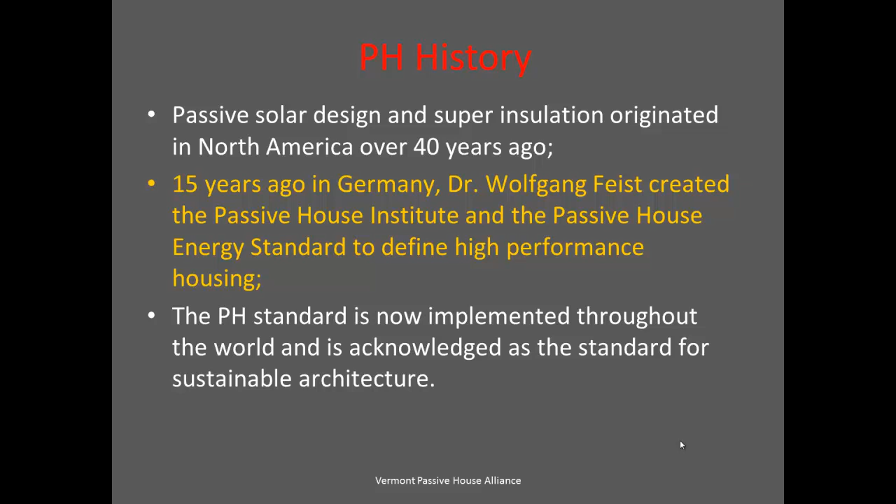And now the PH standard, Passive House, has been implemented throughout the world and has been acknowledged as a standard for sustainable architecture and low-energy house usage.

The Passive House principle is based upon the highest energy standards applicable to all building types. So we're not just talking about residential buildings, we're also talking about commercial buildings. The main focus in the Passive House is on energy conservation through making the building envelope as energy efficient as possible. That's where the name passive comes from - you put a lot of energy and effort into making the envelope as good as possible so that the actual building during use uses as little energy as possible. It uses a very sophisticated energy modeling software to inform design decisions.

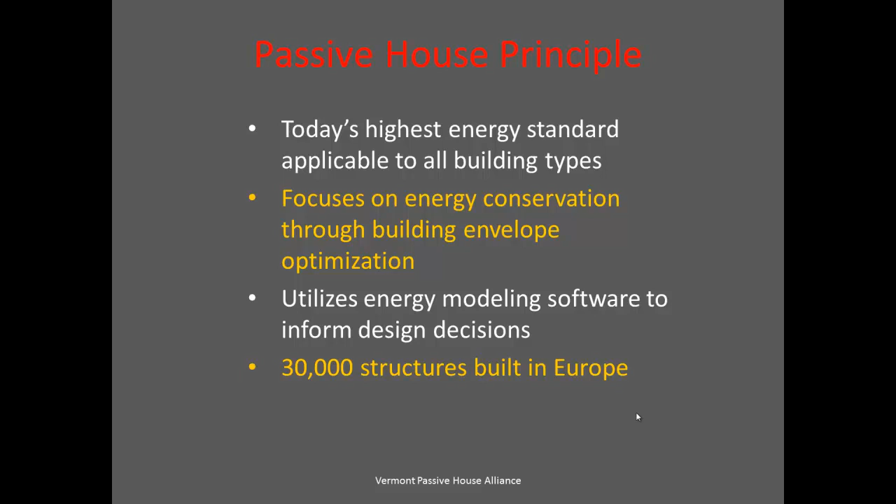There are more than 30,000 of these structures built in Europe, so it's not as if Mr. Feist created the standard in 1995, built 3, and everything is based on 3 buildings. Now there are more than 30,000 structures and buildings built in Europe, and these buildings are operating as designed.

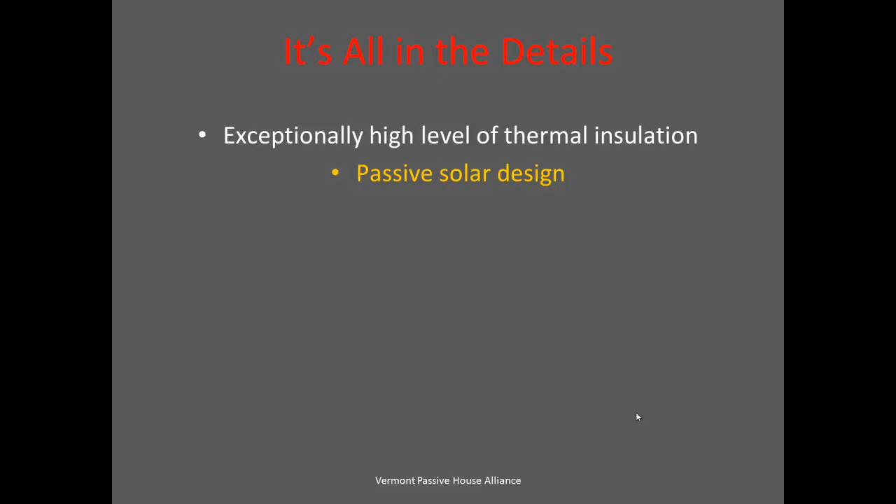With a passive house, building the actual envelope is all in the details. We have an exceptionally high level of thermal insulation. We have a passive solar design to capture as many BTUs of heat from the sun as we can during the heating months. We use extremely well insulated windows with extremely well insulated frames and triple low-E glazing.

We build our buildings so that they are thermal bridge free, which means there are no places, or as few places as possible, where cold can seep into the house or heat can seep out. And we demand a very high level of airtightness on our buildings. The current code, the RBES code, has an air changes per hour of approximately 4.

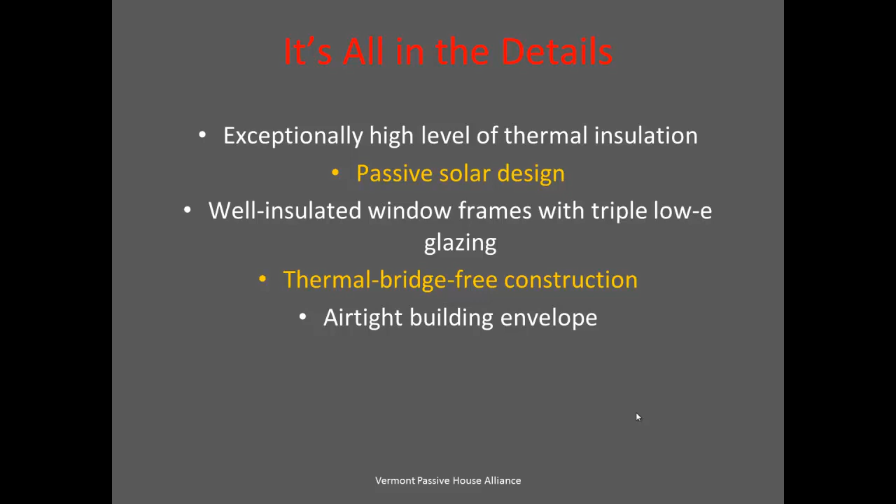The Energy Star standard has an air changes per hour of 3 at 50 pascals, which is about the same as a 22 mile per hour wind blowing on the outside of your house. The Passive House standard is 0.6, so less than 1 air change per hour. And we have a high efficiency heat recovery ventilation system. Because we build our houses very tight, we need this recovery ventilation system, but this also adds to the energy efficiency of the house.

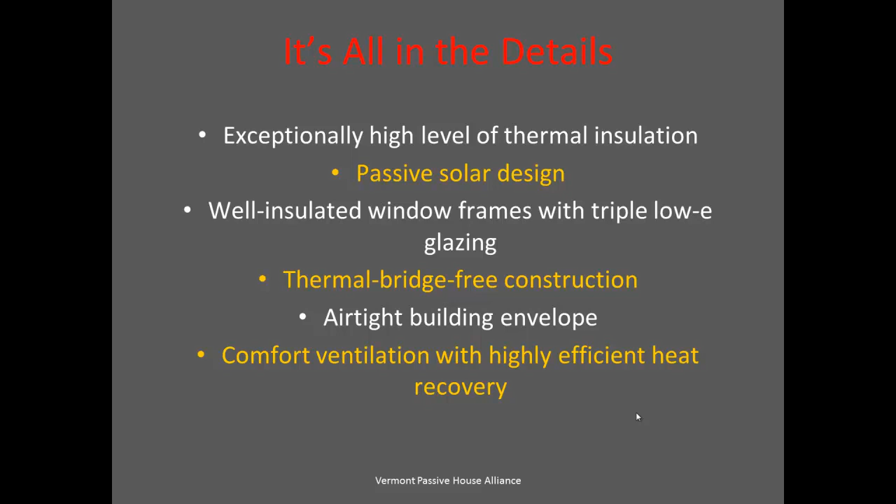The results we get with the Passive House are a dramatic reduction in energy consumption - we're talking 90% less than a standard code house. Superior indoor air quality - all of the monitoring that has been done shows that the indoor air quality of a passive house is almost as good as outdoor air quality. Occupant comfort - the Passive House is built and designed so that all of the rooms are exactly the same temperature or near the same temperature, without huge temperature swings.

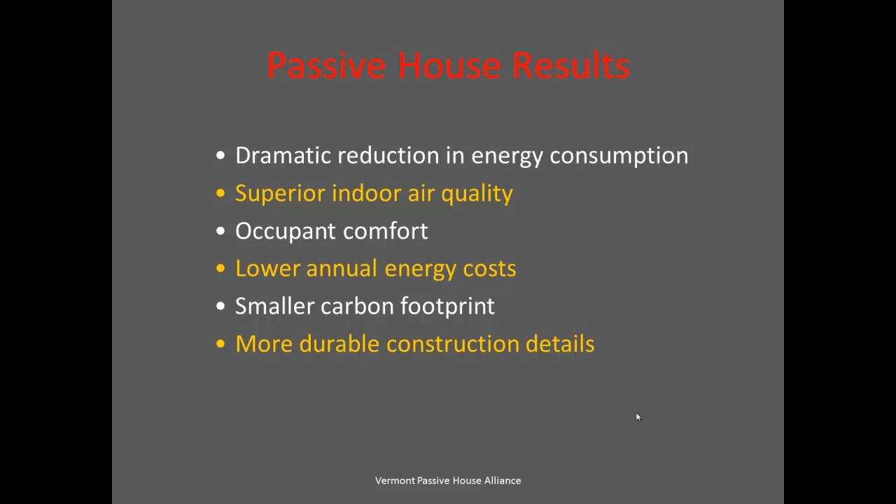Lower annual energy costs, up to 90% lower. Smaller carbon footprint - the Passive House standard asks not only that we use a lot less energy, and that we're able to use less energy because we're building with this standard, but also that when building the houses we use materials that have low embodied energy, meaning less energy is required to make the materials that go into construction. And it's a more durable construction because of the high quality required for building a passive house. In order to get that airtightness, we end up with a house that has less moisture infiltration, thus less mold, less damage, and a longer living and more durable house.

The indirect benefits: one, it is the only energy standard able to achieve carbon neutrality, as heating consumption is up to 90% lower than a conventional building. And because the making of a passive house is actually done by local companies, we have seen a large increase in Germany of businesses created to support the passive house industry.

For instance, since Passive House started in 1995, there are now 50 new window manufacturers in Germany that build certified passive house windows. Those are jobs that we can also have here in America, and not only in America but specifically in Vermont, if we find industry leaders who are willing to take on creating passive house windows and other materials for passive house.

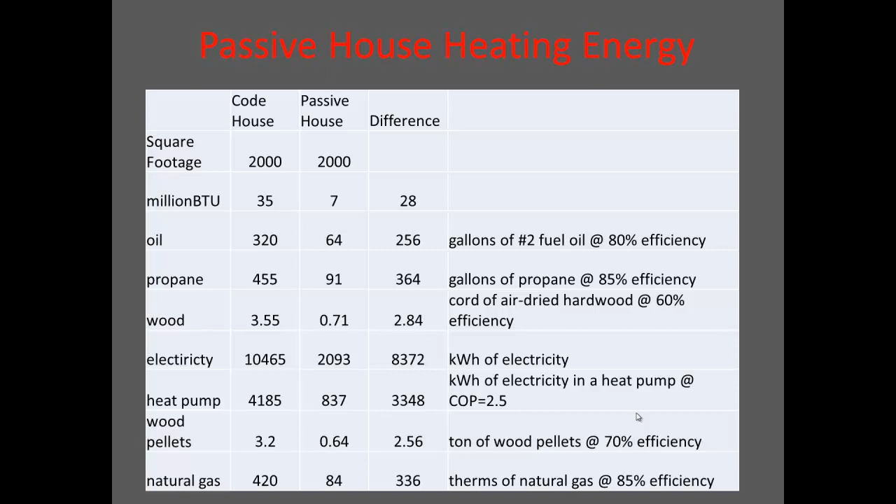Here's a chart that shows the difference between a code house and a passive house. Both houses are approximately 2,000 square feet, comparing the millions of BTUs annually required to heat each. A code house needs 35 million BTUs, a passive house needs 7 million BTUs, giving us a difference of 28 million BTUs per year. Here are different types of fuels that would be required to heat that house at that BTU level, and what the difference is.

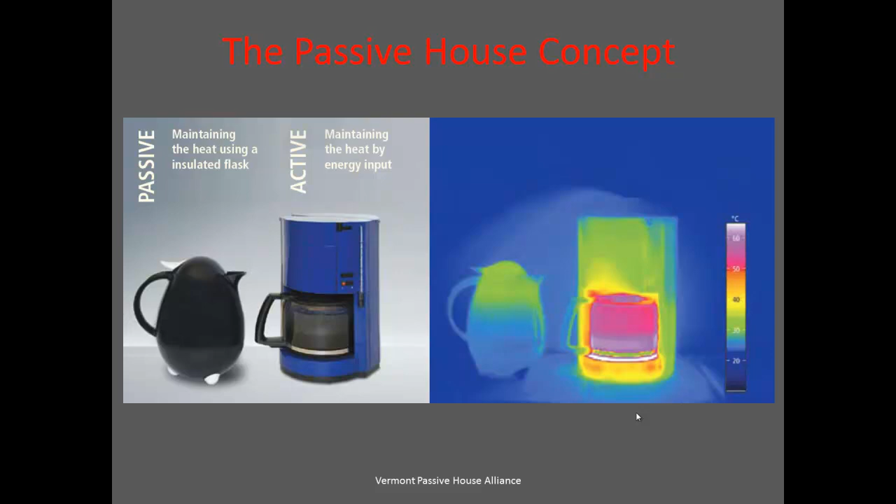In the thermal image on the right here, you can see that as the temperature gets up, it gets closer to white. It starts at blue at very little energy loss, and goes all the way up through red, yellow, red, purple, all the way to white. You can see that the Mr. Coffee, of course, is losing a lot of heat to the room around it, while the coffee thermos is not.

Similarly, here we have a row of apartments in Germany, in Frankfurt. Before there was a passive house renovation on these buildings, the lower left shows the energy loss of those buildings. You can see a lot of white, certainly a lot of yellow, especially around the windows. Obviously we're losing a lot of heat through this facade in the house.

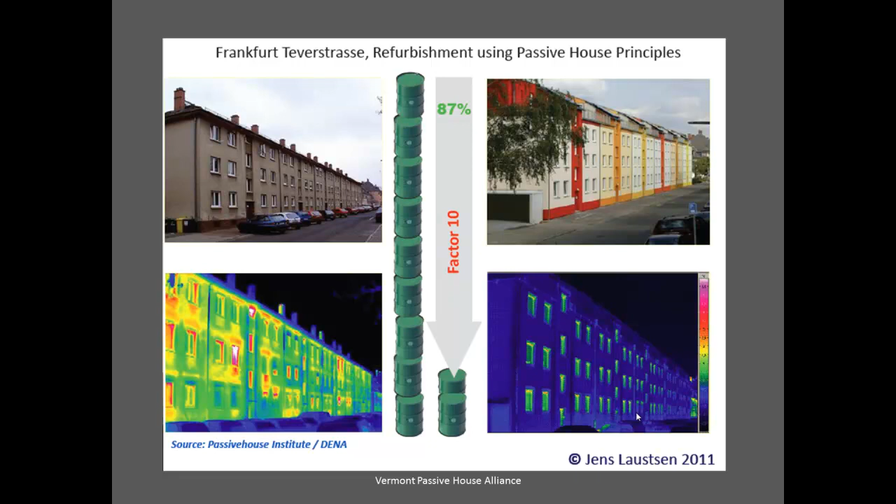Then when we go to the right, we see after the passive house renovation a thermal imaging of that same row of houses. You can see there's almost no red, it's all green and mostly blue. And here in the middle we see the reduction of 87% in the energy use of that building to heat it during the heating season.

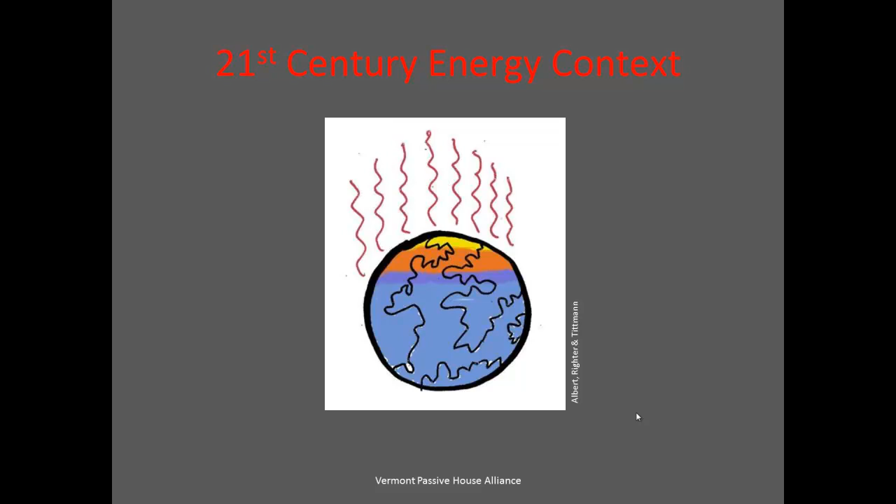Now we need to think about building houses and how we're building houses now in the context of our 21st century energy situation. The problem is, and most people don't know this, that buildings are the largest contributor to climate change. This is a chart which was put out by Architecture 2030.

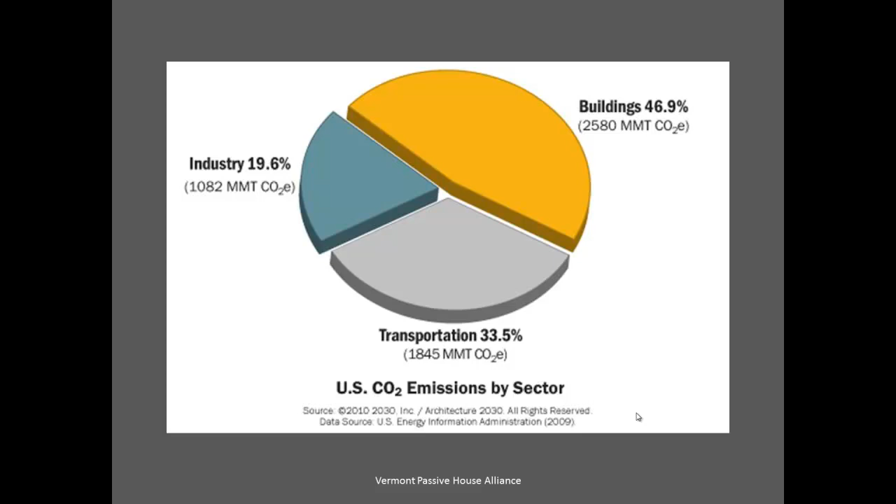Available online at www.architecture2030.org, the source of this energy data is the United States Department of Energy Information Administration. As you can see, shockingly, beyond what we might imagine, buildings and the energy that buildings use per year accounts for 46.9% of the energy that we use as a society. Transportation, where a lot of people are putting their time and effort, and those are all very good initiatives, actually represents 33.5% of the energy used and CO2 emissions therefrom.

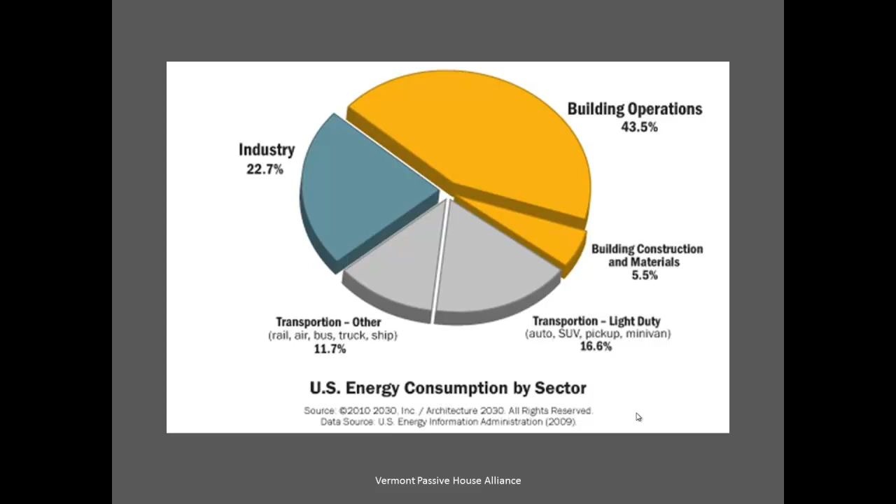When we break that down by sector, we see that not only are our buildings using more energy than transportation or industry, but it's not building our houses and commercial spaces that is the majority of that. That's the small yellow wedge, building construction and materials. Rather, 43.5% of all the energy consumed in the United States is for building operations, and a large part of building operations, of course, is heating and cooling.

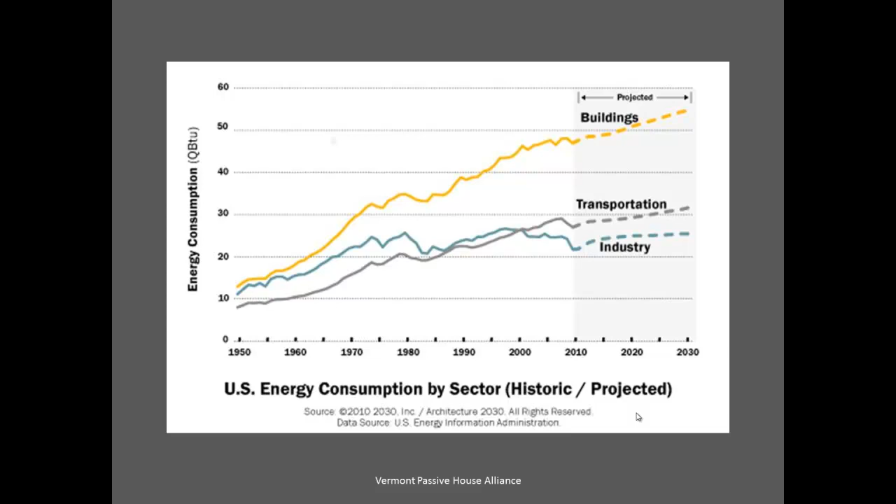The U.S. energy consumption by sector, a historical chart, shows us, if we look at the top, the yellow, that's the buildings. While industry and transportation are a large part of the energy used, their consumption is actually leveling off over time, and the increase in energy used in transportation and industry is not increasing at the same rate as the yellow. This shows us that buildings and the projection of their increase over the next 20 to 30 years will be a larger and larger portion of our energy use.

This means that we need to look into making buildings that don't contribute to this change. That seems like a large problem, but actually, with some care and a slightly larger price tag on a new house, we can reach that very easily.

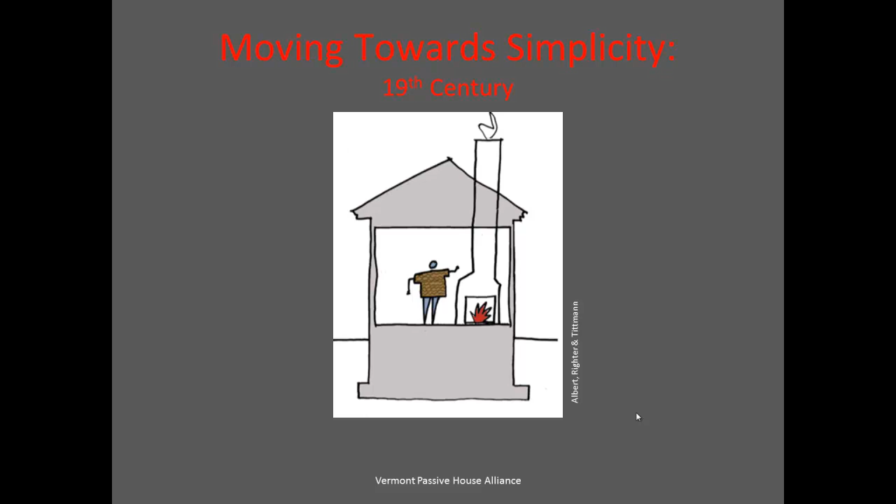Then we got to the 20th century, where we got very good at designing mechanical systems that would heat our house: oil heat with radiators, using steam in some places, even wood-burning stoves that are higher efficiency. We loaded our house with these low efficiency but very good heating systems. They used a lot of fuel, but they did the job.

We could take our sweater off, but we had all of these systems throughout our house that required maintenance and replacement over time.

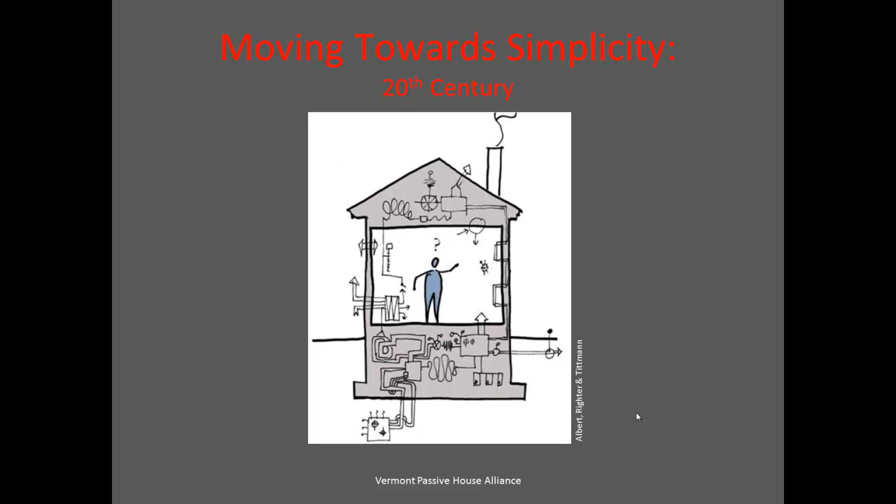Now moving towards the 21st century and how we can build buildings, how we can build our houses - here we have the passive house concept. Here we have a house that's oriented towards the south so that we take advantage of solar internal heat gain. We have a very small air-to-air heat exchanger pump in the wall on the upper right, and then we have that high efficiency heat exchanging ventilation system that recovers heat as it brings in fresh air.

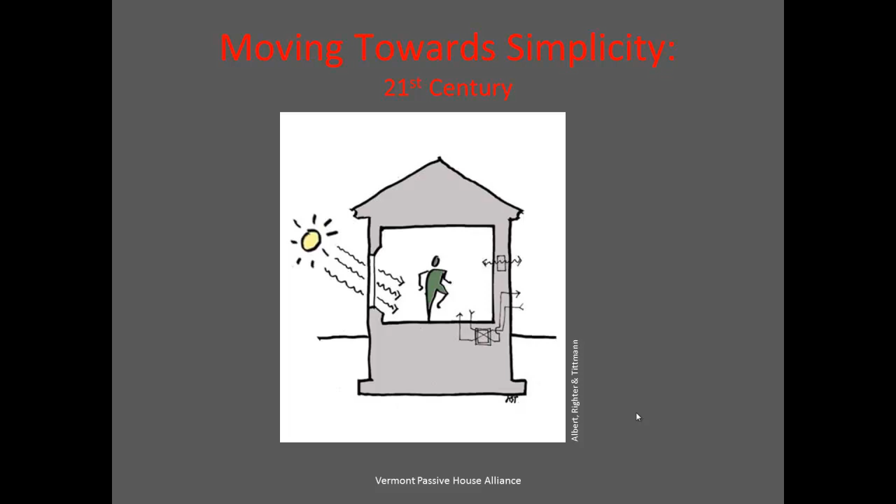Architecture 2030 has a challenge, and the energy goal is to move towards carbon neutrality by the year 2030, thus the name of the challenge. Today we're at 60%. The idea is that we will move towards 70, 80, 90, and then 100% carbon neutrality.

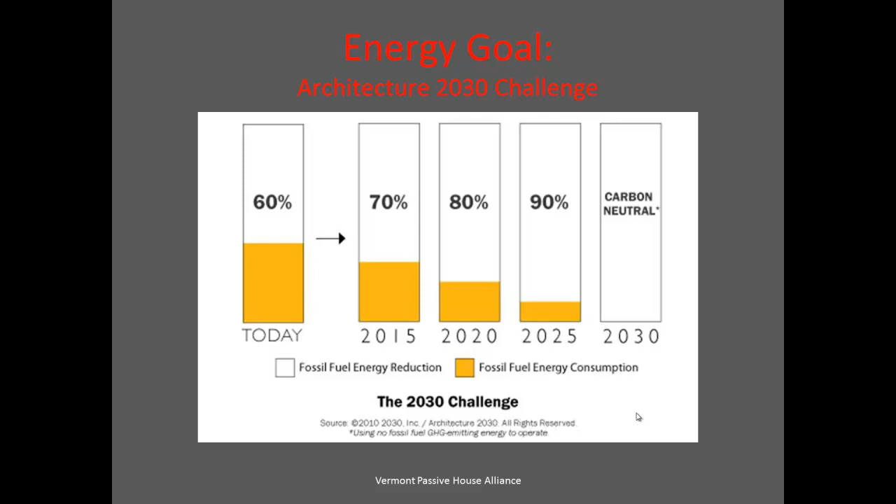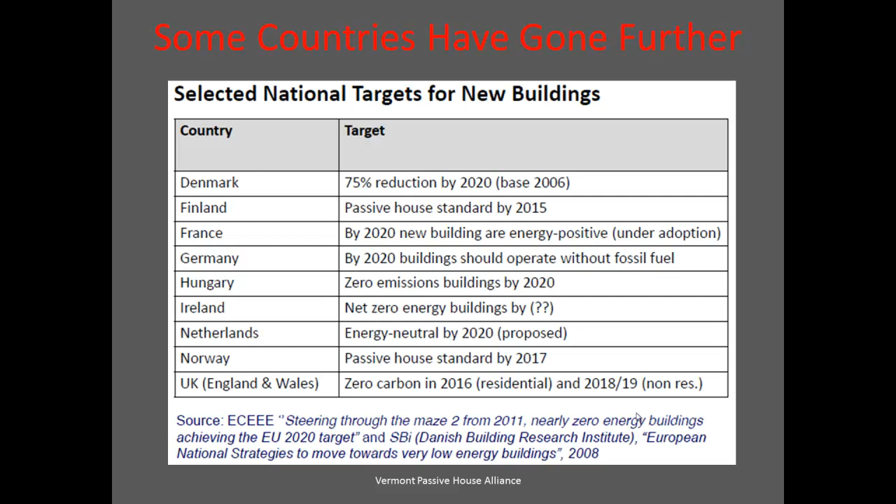Other countries have been moving forward on this, most notably in Europe. Here's a chart showing the various countries within the EU and where their standard is now and what they're moving towards in the near future to get towards carbon neutrality, or at least in the direction of carbon neutrality.

One example out of that chart is the Danish building code, where the gross energy, including heating, cooling, ventilation, and domestic hot water, was in the existing stock 145 kilowatt hours per square meter per year. Forgive us for using European numbers here, with kilowatt hours and square meters, but that's how the information came to us. Then they set up an energy standard based on the existing buildings.

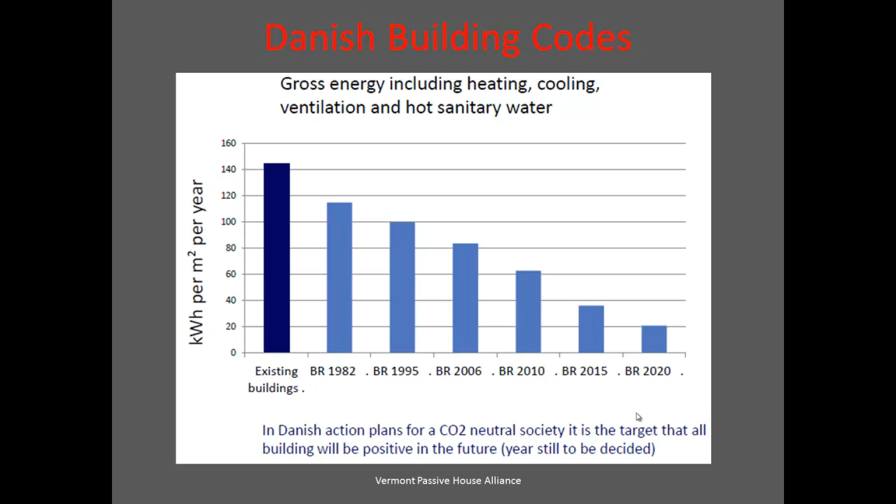Every number of years they cut down the acceptable new building code. So BR 1982 is the building requirements from 1982, which were 15 to 20% less than the existing buildings had been. In 1995, that was again reduced by another 10%, and every couple of years they're reducing that more and more until by 2020 they'll be at the Passive House standard.

Now, the energy standard that we believe is a good one to go forward with - it is certainly not the only one, but it is a very stringent one and will get us to our goal. It is supported by and developed by the Passive House Institute in Darmstadt, Germany, which is Dr. Feist's organization, and the Passive House Institute in the United States, which is located in Urbana, Illinois.

Now, what is the Passive House Energy Standard? A lot of people know and have heard about LEED, or the National Green Building Standard, but both of those standards have almost nothing to do with energy use of a building. They're much more about using unused land that has been used for industrial uses in the past - brownfields, as they call them - locating houses near public transportation so that people don't have to use their cars. Only 15% of LEED has anything to do with energy efficiency in the house. So you can have a LEED Platinum house that is not at all energy efficient.

The Passive House Standard is really only interested in the energy use of the house and, as I said before, in the low embodied energy of the materials used.

Here is the standard. If you can build a house that meets these 4 standard points, then you have a passive house. Those are: a heating load in the house of 4.75 kilo-BTUs per square foot per year, and a similar cooling load - so not more than 4.75 kilo-BTUs per square foot per year for cooling, which in our environment is much less of an issue.

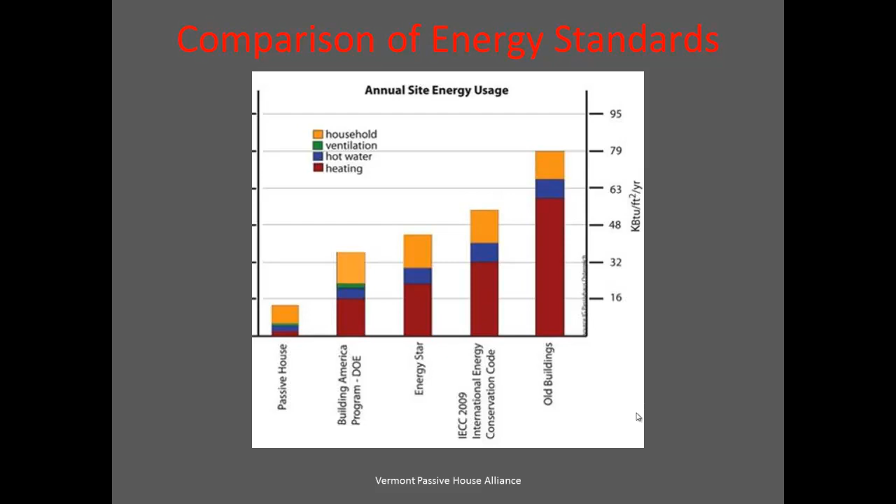What are the economics of a passive house? I mentioned at the beginning that when you build a passive house, you're actually going to be spending a little more to build it in order to get very large savings later. This chart shows the development of a passive house by applying passive house concepts going down the line. So the leftmost bar shows a code house with a primary heating demand of 60 kBTUs per square foot per year. And then we start with new massing and window location.

So we make sure that we have our windows to the south and then we gain a certain amount of heat, which then comes off of what we have to add, so our heat demand goes down. We add windows, those high insulated windows with insulated window frames and triple glazing, and that brings another 15% off. We design it very carefully so that there are no thermal bridges.

We then go to air tightness using a high efficiency energy recovering ventilation system, either an ERV or an HRV as it's called in industry. And then we get to the passive house insulation with, in this situation, an air-to-air heat pump.

And you can see that the red bar has gotten smaller and smaller all the way along, and that the blue bar, which is our primary energy demand without heat, which includes our hot water, our electricity for lighting, etc., has not yet decreased. So we put in a solar hot water system that cuts that domestic hot water, and that leads us to our final passive house at 5.3 kBTUs per square foot per year, which is then reduced further by application of other design ideas.

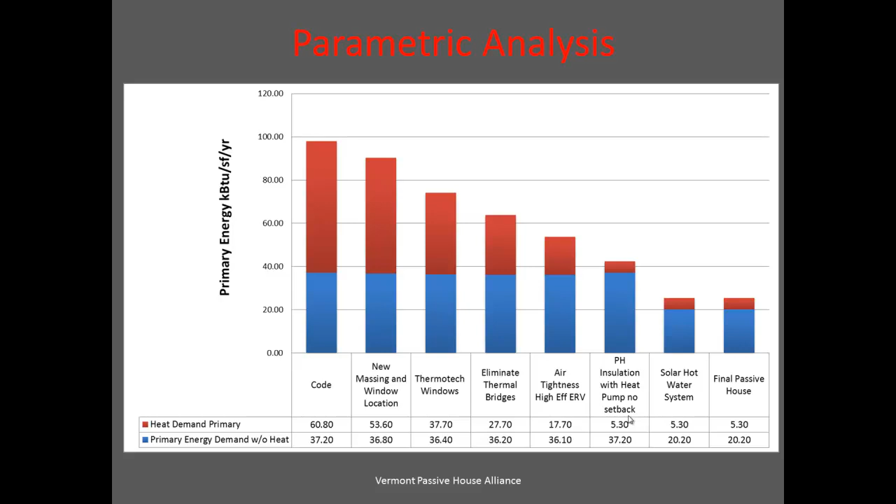Now, when I said at the beginning that a passive house costs more, the actual data that's been coming in of passive houses that have been built here in Vermont shows that the passive house costs between 8 and 10% more than a standard house. Here we have an analysis that overblows that percentage. We have a $180,000 house, that's the cost of construction of the actual house, a code house. The upgrade here is estimated at 20%, which is about 10% more than what we're seeing in the field as to the actual cost of a passive house.

So the passive house costs $216,000. In order to finance that, we need to take out more money. That's that $36,000. And that $36,000 is then something that we have to make back. That's then the payback moment.

We're looking here at an estimated annual increase in energy costs, so the amount that energy costs more every season, which here is estimated at 5%, but historically natural gas and propane in Vermont cost 7.5% more. And we've had some very large increases recently, although with natural gas, if you're on the natural gas line, which most Vermonters are not, there has been a slight decrease due to fracking.

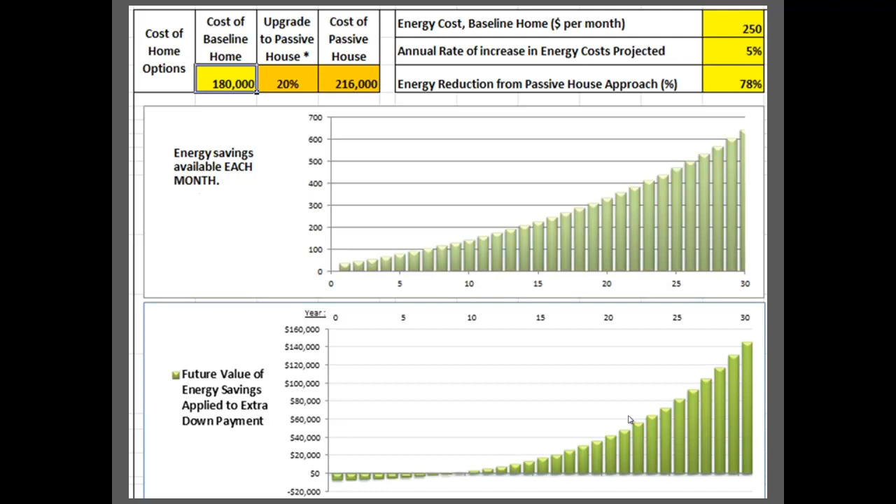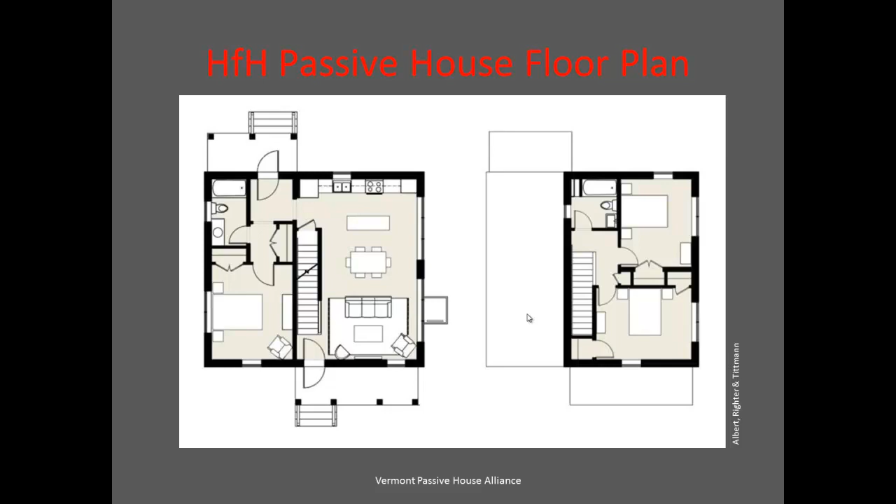Now we're going to look at a Vermont case study, and that case study is of an actual passive house that has been built here in Vermont. This is the Habitat for Humanity passive house. This is the floor plan for the passive house. This house has a 1,050 square foot usable floor area. The outside dimensions are 1,200 square feet. Here we have a downstairs with a bedroom, a bathroom, a living room, a dining room, and a kitchen. And on the right we have the upstairs with 2 more bedrooms and another bathroom.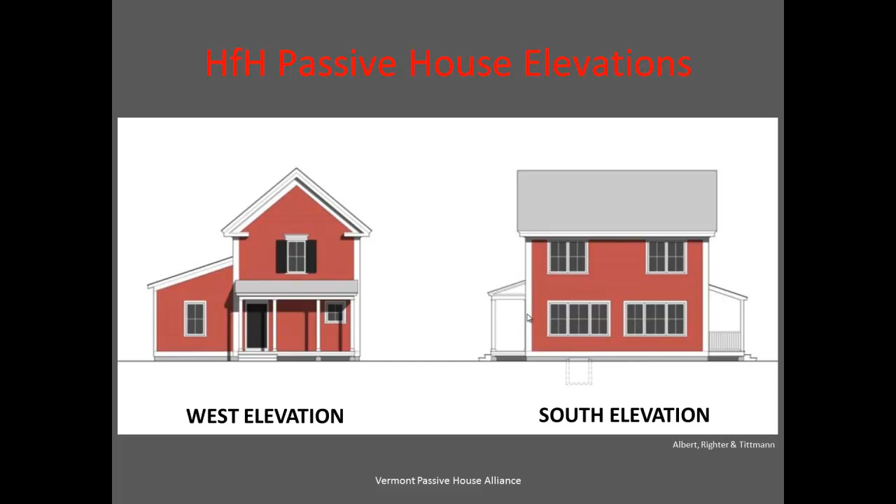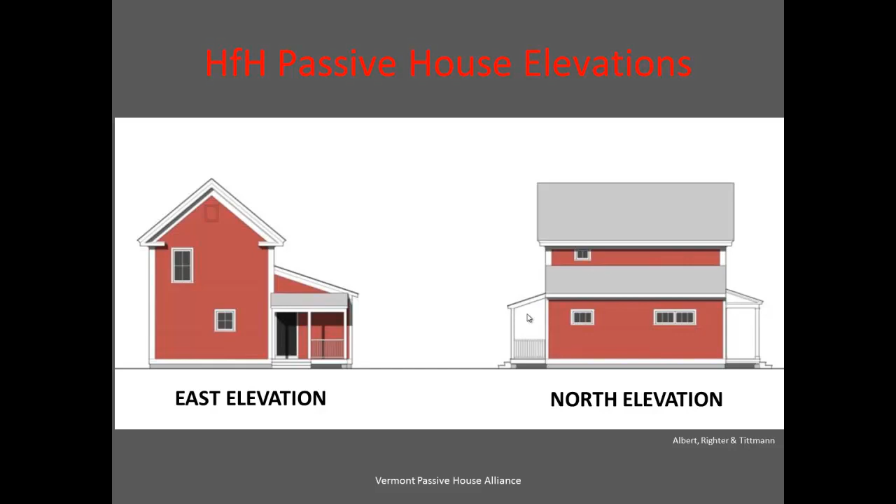This is a picture of the mechanicals for the house, and you can see the one thing that's missing from here is a heating plant. We don't have an oil furnace, we don't have a boiler. What we have here is the high efficiency heat recovery ventilation, and right next to it, with all of the aluminum tubing, is actually a ground source heat loop. That's not a heat pump, but it's actually a heat loop, and that loop is used to pre-warm the freezing air before it goes into the ventilator so that the ventilator does not freeze up during very cold weather, and that's actually working very, very well.

We also have to the left of that two tanks. The first tank going to the left, kind of a goldish colored tank, is the solar hot water collection tank. That is where the water comes from those panels that you saw on the roof into here and is stored and is then sent through to the actual hot water tank next to it. So if the water in the solar hot water collection tank is not hot enough, then the little bit that is the difference between what the solar panels can produce and what you want coming out of your faucet, 120 to 140 degrees Fahrenheit, is bumped up by the hot water tank next to it. And on the ground over there is the filter for the well.

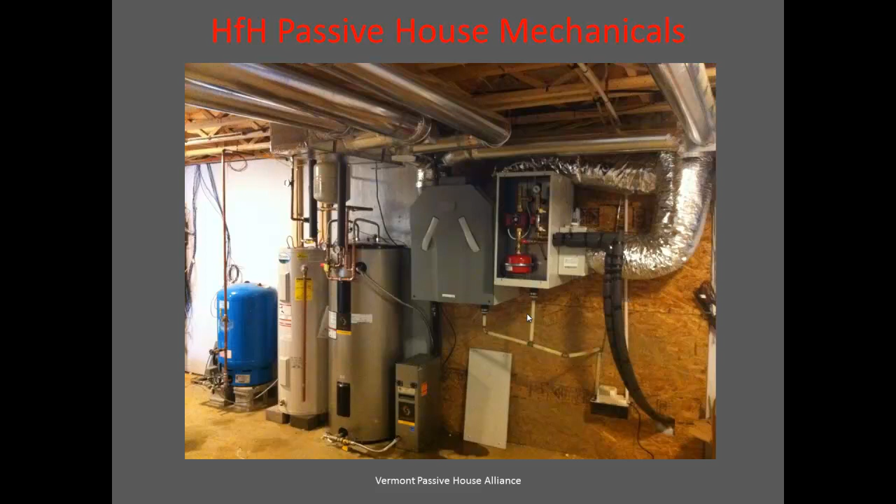Now there is actually a heating system in the house, but it is a 12,000 BTU air-to-air heat pump, which is basically about as much as 2 hair dryers. So we're able to heat this house with just a hair dryer.

This graph shows something very important. There's often a question that we get about the comfort in the house. You can see the graph shows the temperature. The left side shows the temperature, and then the bottom shows the dates. This is the entire month of December, which was admittedly a warm month for Vermont standards, but what's really striking is the indoor temperatures. They're temperatures for various rooms which have been monitored.

The orange circle is the living room where the heat pump is actually adding its heat. Then we have the upstairs bedroom, the downstairs bedroom, the upstairs bathroom, the downstairs bathroom, and upstairs bedroom number 2. And you can see that all of those numbers are very closely grouped. So while the orange circle on the first day, 1 December 2011, was at 75 degrees, the coldest rooms, which are furthest away, the upstairs bedroom and the downstairs bedroom, were at 72 degrees. And you can also see, as you follow it along, the red line here is the outdoor temperature of the air.

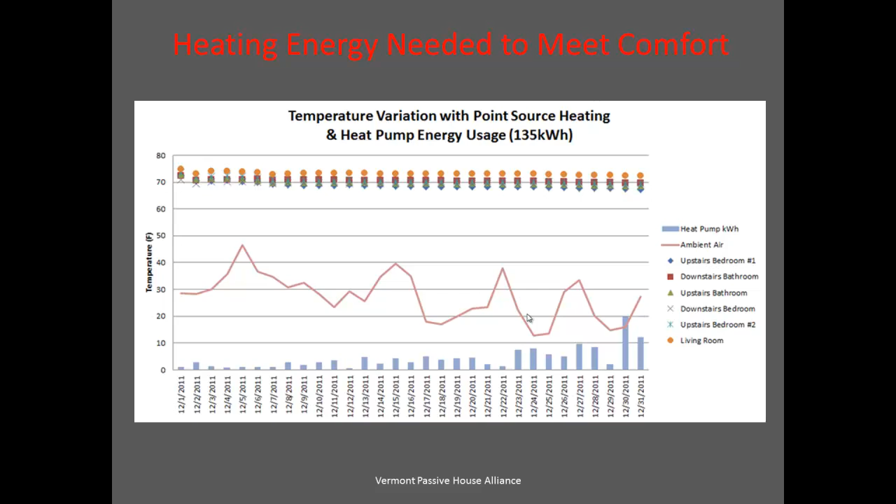Another question we get about the passive house is whether or not we can maintain good indoor air quality. That's a very good question. Since we're making these houses very tight, we need to be able to show that we're able to maintain indoor air quality. The indoor air quality requirement from ASHRAE, which is the American Society of Heating, Refrigerating and Air-Conditioning Engineers, is 1,200 parts per million of CO2 equivalent.

And you see on the right here that our graph starts at 535 parts per million CO2 equivalent and goes only to 585. That's because we only wanted to show in this graph the actual numbers that we were getting from the passive house. So the graph, if we were to show the indoor air quality requirements for ASHRAE, would be a much larger graph, and the data that we're showing here would be very small at the bottom, about half.

Many indoor air quality experts agree that the indoor air quality of a standard code-built house is hovering around that 1,200 parts per million CO2 equivalent, and can actually go above that to where it's unhealthy and get back below that depending on the wind conditions and open doors and windows and that kind of thing. Here we have this high efficiency heat recovery ventilation system working 24 hours a day with very little energy use, and the indoor air quality is given here.

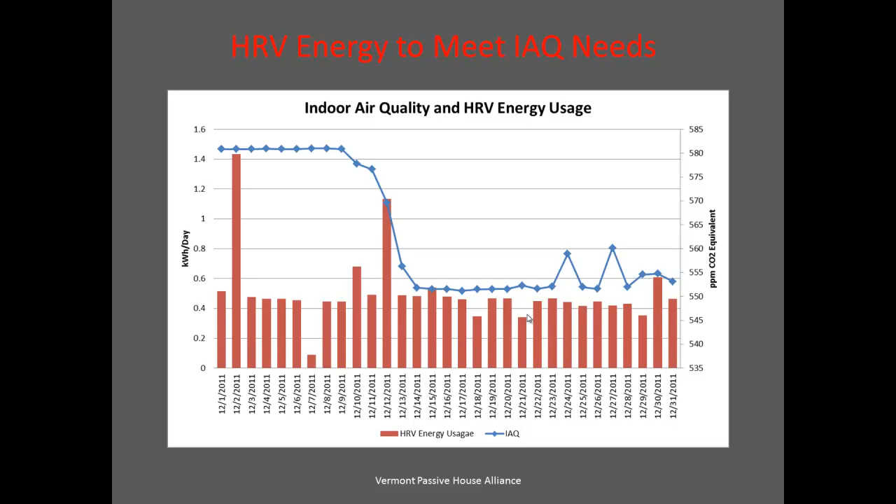This chart shows the energy usage of 5 Energy Star houses, and I showed you at the beginning that Energy Star was about 30% better than code. So it's a relatively tight house, 3 air changes per hour. It has 30% less energy usage, but still has quite a large heating plant inside of it. So the first 5 are Energy Star houses, and then we have our passive house, which is low load number 1. And then we have a house they've built that's close to passive house, which is low load number 2.

You can see very clearly that the usage, and these are actual usages compiled by Peter Schneider of the Vermont Energy Investment Corporation, which is the company that runs Efficiency Vermont, the actual energy usage is 5 times, 6 times higher than the passive house. At 5,000, now we get 10 times higher, 4,717, still almost 10 times higher than the 512 heat and domestic hot water load of the passive house.

Now you may wonder why low load number 2 has 2,000 kBTUs per square foot per year, and the reason is that house is actually being lived in by a family from the Sudan, and that family likes to keep the heat in the house at 90 degrees so that they're more comfortable, because the winters here are quite cold. So instead of keeping the house at 68 degrees, that family has opted to increase the heat in the house. But still, even with that 90 degree temperature all year, we're still seeing a usage that is a third of some of these Energy Star houses.

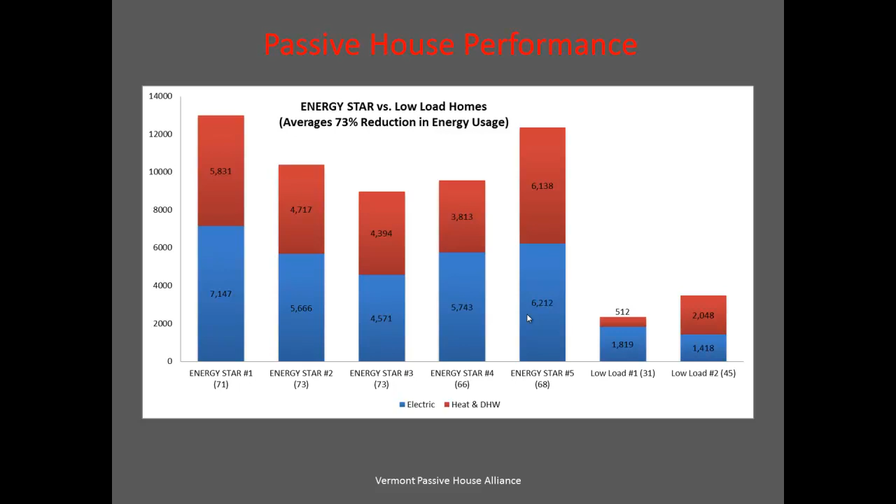This is the chart that says it all. This is the average use of this house from June through February, compared to the actual usage of that house on electricity. It's important to note that this is the entire electric bill for this house, which heats with electric, has electric hot water, electric cooking, and electric lights, computers, game consoles, televisions, and other electronic devices. All of that is in this number.

You can see the number does go up in January to $132 for heating, hot water, cooking, game consoles, computers, televisions, and everything. But the average monthly cost is $67. When we look at how much of that is actually created by the heating demand, it's estimated by Peter Schneider of VEIC that $20 average per month is being used to heat this house. So these people are heating their house with $20 a month average, $240 a year, to heat this 1,000 square foot house.

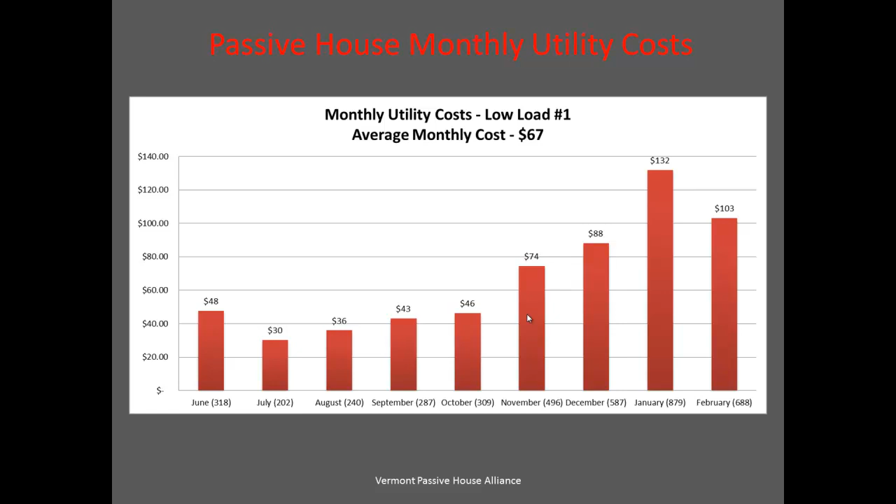Now I'm going to show you some houses to give you an idea of what Passive House looks like in Vermont, and also to let you know that passive houses can be of various designs.

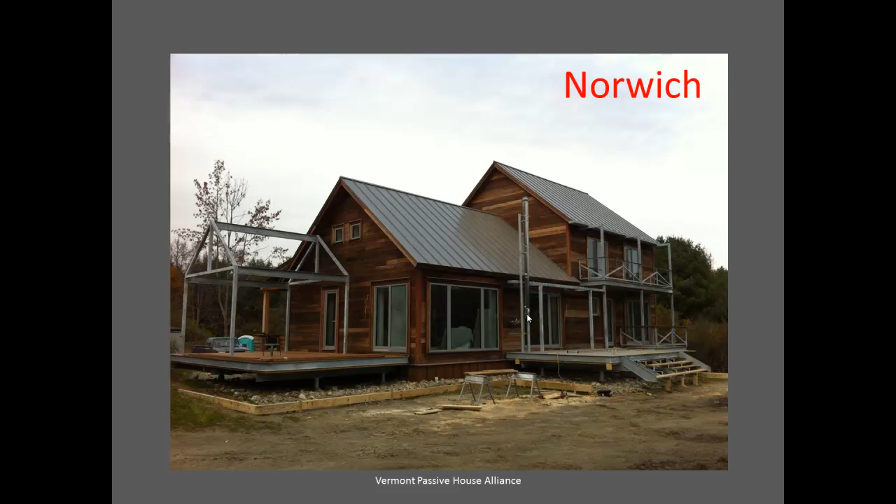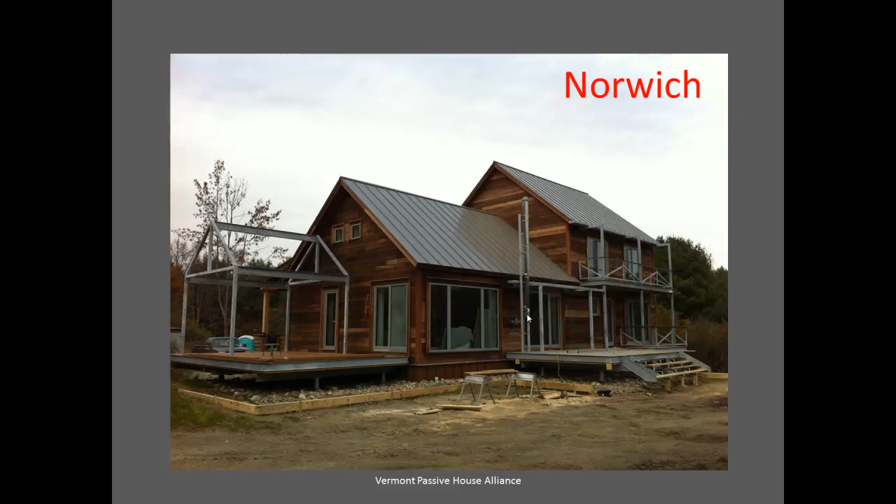This is a passive house built in Norwich. Once again, you can see the shape of the house can be just about anything. You'll notice there are not many dormer windows and not many bump-outs, and that's an important part of keeping the thermal bridging down on a passive house. Those things can be built onto a house, but we prefer not to, because of the added cost to insulate and deal with the thermal bridges.

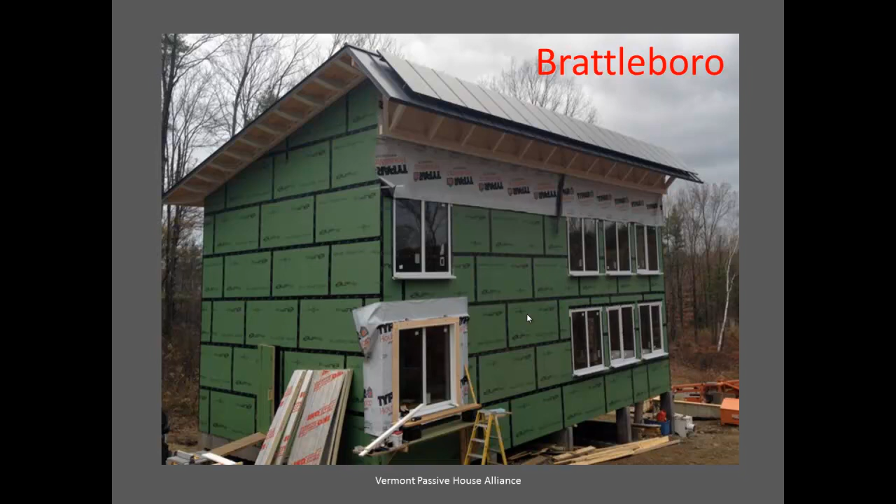Here is a salt box now being built in Brattleboro. This one is not built on a slab, it's built on piers, so they've super insulated the floors. Those are the Thermatech windows you saw modeled in one of the charts above, and this house is also a passive house.